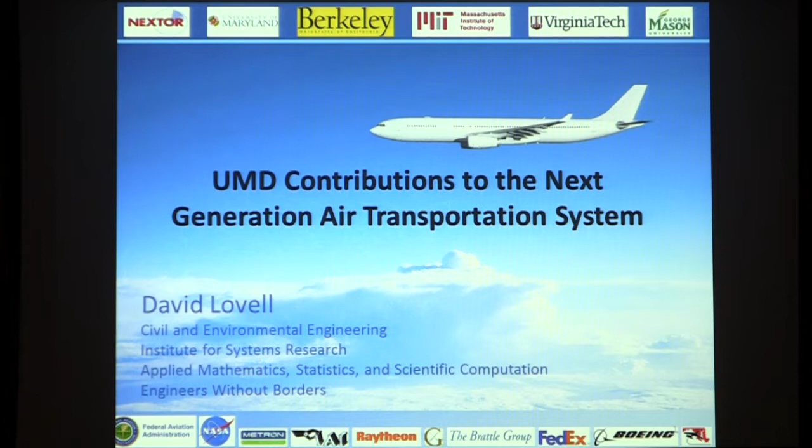But I want to talk about what's coming, and then in particular what we're doing that plays any part of a role in that. So here's how I had parsed what I wanted to do today. Tell you a little bit about the group that we have here in Maryland, who we are, tell you a little bit about this new idea, where we're going, and what we've been doing to get it there. We do a few different flavors of work ourselves. We work on these things called traffic flow management initiatives. I'll tell you a little bit about that.

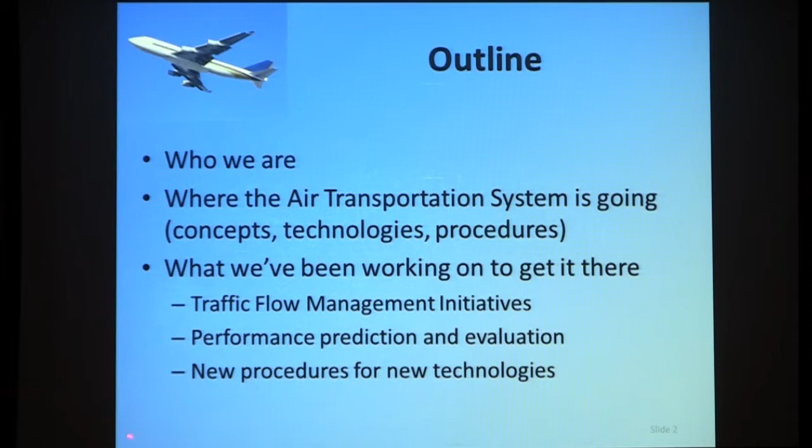We do a lot of work in predicting and evaluating how the system as a whole is performing at individual airports and overall, and even for specific carriers and even for specific flights. And then we're also doing some work on developing new procedures.

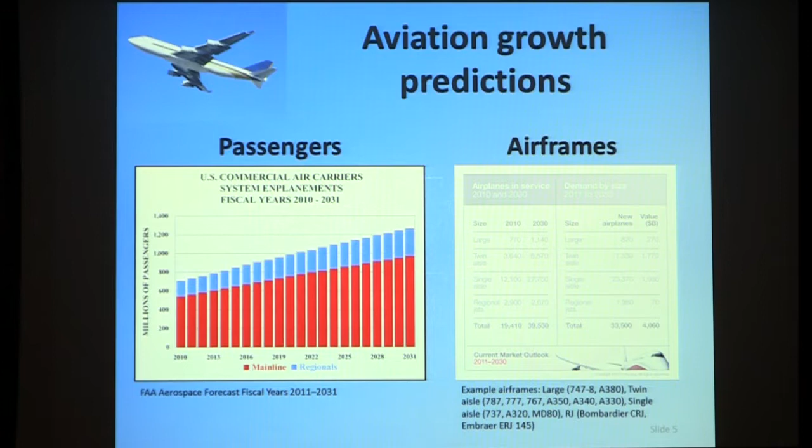The other thing that's interesting to look at, here's some statistics that Boeing put together in terms of their projections comparing last year and 20 years from now, how many of all of these different size aircraft are actually active in the fleet, and what do they expect to happen? And in almost every category, you can see growth. So these big A380 type ginormous planes, there's going to be a lot more of those. There's going to be a lot of the Dreamliners, 777s, all of that. There's going to be a lot more of the 737s and the smaller things that we probably spend most of our time on. The only thing that's going to go down is these little regional jets. That was a bit of a fad. It won't go away entirely, but they won't find quite as much use as people had originally thought.

Okay, so each of these slides is supposed to tell sort of a small piece of the story. So the first part of the story is that we're going to have more air traffic. It's going to get busier, and for those of you who fly a lot, you already know that it's already busy. And because it's already busy, you experience cancellations and delays and misconnections and all these kinds of things.

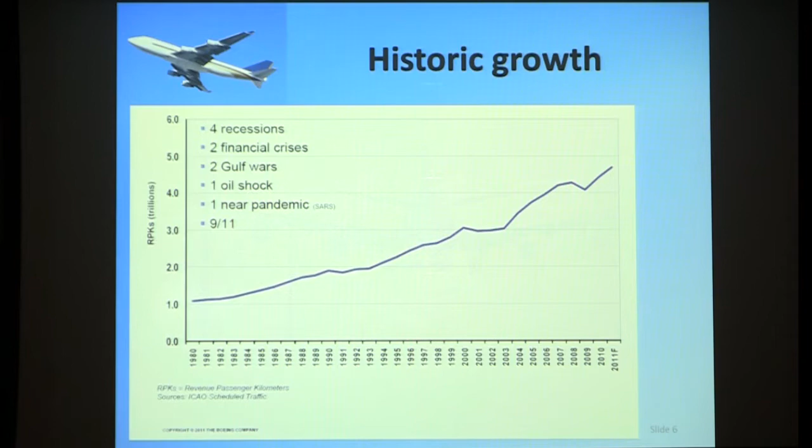So that's probably going to go up too, and probably at more than inflation. The fuel prices are playing a role in that. There are probably going to be different ways of assigning taxes and user fees that are going to change. So we're probably going to end up paying a bit more. But I try not to be too much of an economic prognosticator.

The previous picture was that air traffic is growing. This picture is whether it's growing or not, it's complicated. There are tons of competing and conflicting things that happen within the airspace system at individual airports that cause the whole system to be an enormously complicated thing to study.

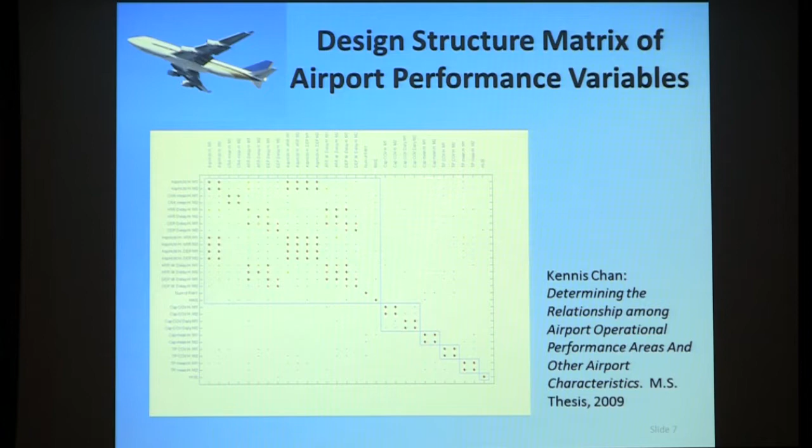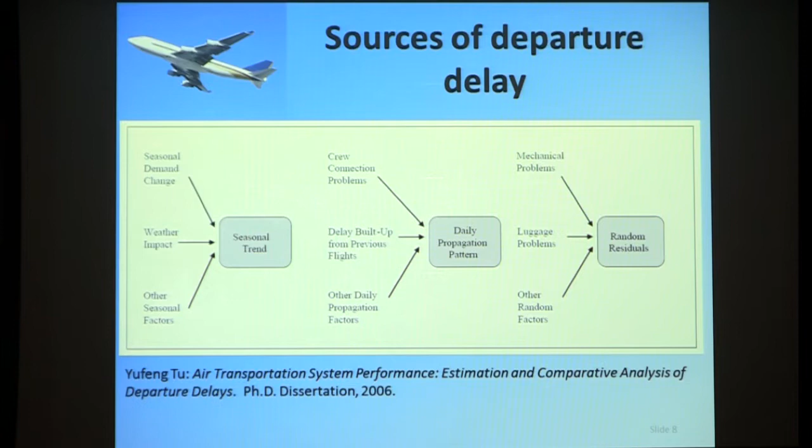The pilot will tell you that a piece of the plane fell off, and you have to wait for them to bring another one. You normally don't want to hear that. Or the crew was drunk, so they had to get another one of those. Or all of these different kinds of things. And there's more than just this, but each one of these things is an added complication that we have to worry about.

And delay, I think, is something that we talk about a lot because it's something that the individual passenger experiences and really can strongly relate to. Their goal is to be at a certain place at a certain time, and they've reverse engineered their schedule so that those things happen. And when you tell them, no, you're going to be an hour later than you thought, depending on how they had stacked things up after that, that could have a pretty big impact on them. Delays themselves, just looking at delay, is complicated and messy.

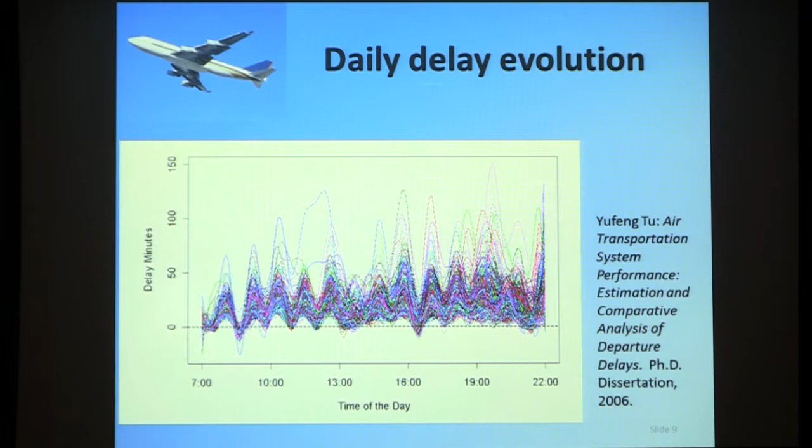Okay, so with that backdrop, aviation's complicated, it's busy, and it's only going to get worse. Enough noise was made, enough complaining happened, enough Congress people got involved that somebody said, all right, we've got to do something about this. So we're going to write some laws, create some new things, put a bunch of people to work on this problem, and see what we can come up with.

So this next generation air transportation system, NextGen is its most recent moniker, was created in 2003 as part of the Act reauthorizing the FAA at the time. You've probably read in the news recently that the FAA is not currently reauthorized, and they keep moving from continuing resolution to continuing resolution. Nevertheless, this is one of the last times that they were officially authorized.

As part of this, they created this Joint Planning and Development Office, which essentially means representatives from all of these important agencies have to get together and form committees and working groups and have meetings and panels and projects to figure out what we are going to do about what's thought of as unsustainable air travel demand growth.

So you can see the obvious things: the Department of Transportation, Homeland Security, Federal Aviation Administration, NASA, but there's also the President's Office of Science and Technology Policy, DOD is there because they have a role to play, Department of Commerce is there. All of those people are involved. You can't do a big government program without having org charts and structure and offices and blah, blah, blah. So this is kind of a big overview of who's involved.

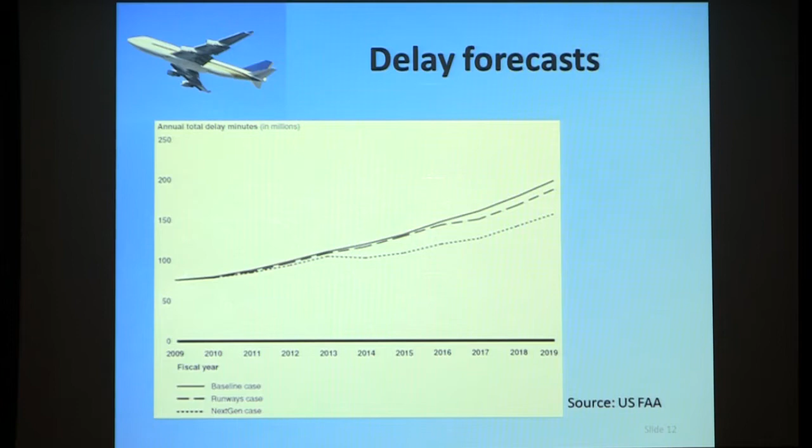Now, don't be too dismayed that the curve still seems to be rising, because that's against the backdrop of the fact that more people are going to be flying. So if you divide that by the number of people that are actually flying, your personal experience, which would be the ratio of those two things, might actually be a little bit better. Because this is aggregated across everybody, but the size of the everybody is actually going to grow.

Okay, so what are the sorts of things that we do to participate in this program? We do a lot of work on what we call resource rationing. In the United States, air carriers, for the most part, except at a few airports, can decide by themselves, purely autonomously, what they want to do. They say, I want to schedule a flight and I want to go from here to here.

As long as they're certified to fly that particular airplane and to land at that particular airport, and as long as they have a contract with the people at that airport to come out and refill the plane with fuel and to deal with the baggage and to put sandwiches on board and all of that, they're perfectly free to schedule a flight into that airport at whatever time they want. Nobody can tell them otherwise.

And they set all their schedules, and they're thinking about, well, what are my competitors doing and all of this, but they also know what do my clientele want to do. They schedule all of these flights, and purely by accident, most of the time in most places, the planes can take off and land with very little interference.

But also by accident, what tends to happen every now and then is more people schedule themselves into an airport than the airport can handle at any given time, and then somebody has to say, okay, we're going to have to do something about that, because we can't have them all arriving and trying to land on top of each other. And this is one of the things that air traffic controllers are responsible for, is to figure out that this is happening and to start pushing these planes back, or pushing them to the side, or having them fly around in circles for a while until they sort themselves out into an orderly system.

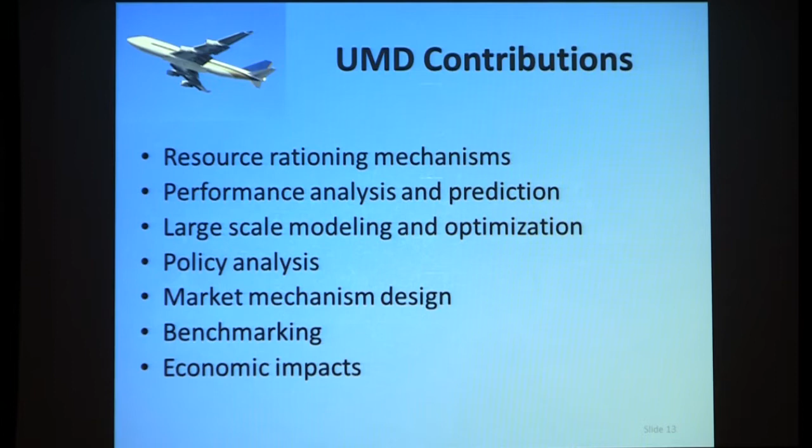Dave? Yes? I know that collaborative decision-making is and has been part of the research program for a long time. Yeah. How much of that is in practice now, like related to the resource rationing mechanisms, versus just whatever the FAA decision maker says? A lot, but there's still stones to turn over. So we have current projects that are thinking about new twists to put on that, but I have a slide in just a second that kind of illustrates that a little bit. It's a good question. So if I skip past that, remind me.

Here's a recent slide whose subject is basically some new rationing mechanisms. What happens right now, for the most part, is if it's time to start thinking about who gets to go next, that's mostly decided on the basis of the order in which you scheduled yourself into the airport. So they look at what would have happened had there been no weather and had there been no capacity problem.

What was the sequence of flights that were going to show up? Let's just take that same sequence and move it back. The problem with that is, if you imagine a flight, let's say, from San Francisco to Denver, and for a while there were thunderstorms in Denver. This happens a lot in the summertime, and so a lot of the planes were delayed.

The practice right now is that you don't act. If you've been held on the ground at San Francisco waiting for your opportunity to get to Denver, you don't get to take off until the weather actually clears in Denver. But it takes a couple hours to get from San Francisco to Denver.

So by the time the weather clears, in all honesty, if you had had a very good crystal ball and knew when the weather was going to clear, you could have taken off 2 hours ago and got there just as the weather was clearing, and everything would have been great. But that's sort of deemed to be an unsafe or too risky way to go about business, so we don't do it that way.

A different way of thinking about that, rather than rationing these flights by the time sequence, would be rationing them by how far away they are from the airport. And give the ones that are farthest away first crack so that they don't end up in that situation. The ones that are closer, if all of a sudden the weather clears, getting them in to fill those newly available slots is much easier, because they're only a half an hour away, whereas you're not worried about these flights that are hours and hours away.

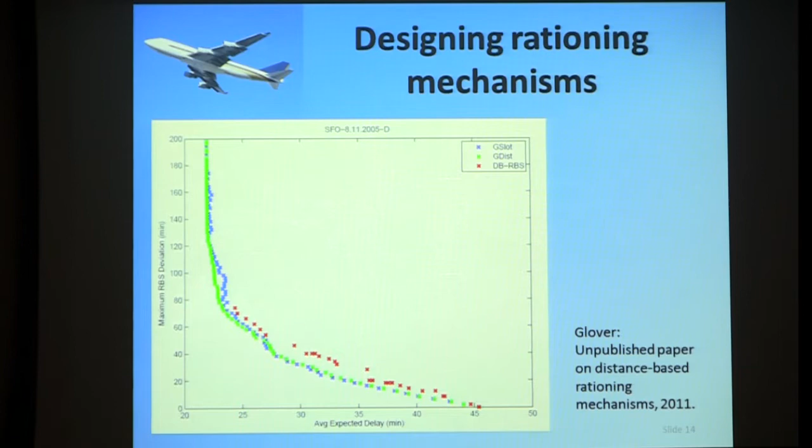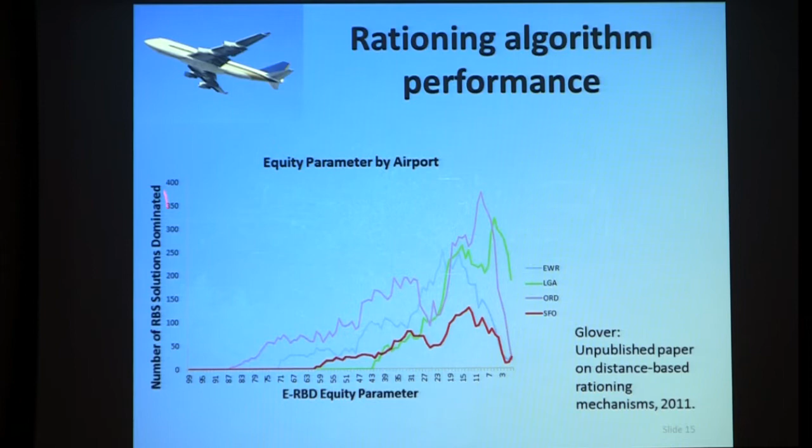This is sort of another way of looking at the same thing. Here's a bunch of different airports. And if we look at this parameter that sort of talks about how do we make sure that, using this distance-based scheme, these short-haul flights don't get too bad of a disposition, how do our new algorithms compare to what would have been done under the time-based rationing?

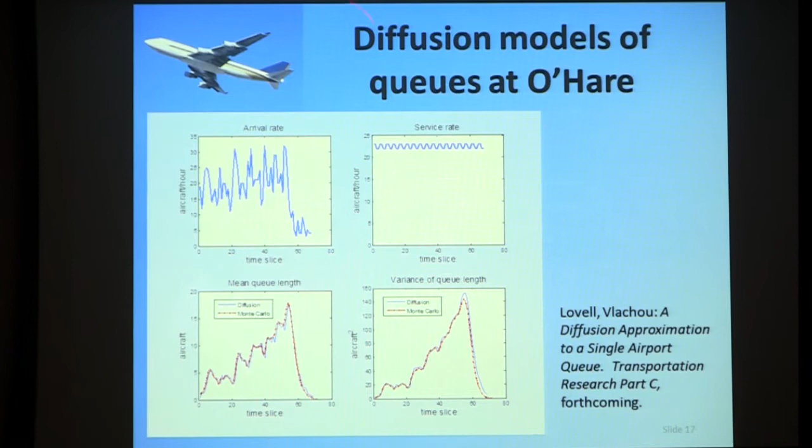We do this sort of modeling in lots of different ways. Here's a picture of diffusion models that one of our students was working on. And this shows sort of similar things. And the point of this picture was really just to show that we did a good job building the model. But we've done this for lots of different airports, lots of different scenarios, lots of different time periods and so forth.

Here's another problem that we worked on. I said that we're going to see more and more planes, and some of the planes that we're going to see more and more are these gigantic things like A380s, assuming that the engines don't catch on fire and fall off the side of the plane, which has already happened once. Well, it didn't fall off, but it caught on fire. They're expecting to see lots more of these things, particularly at places like Los Angeles, because the Asia market, China and places like that, are expected to start really sending a lot of people in this way.

A380s are already coming into Los Angeles from Sydney and from Singapore, and maybe there will be even more of them. San Francisco is the same. San Francisco has tested them. Has tested. They don't yet, to my knowledge, have regular operations into San Francisco, but they've... Lufthansa did. Lufthansa, yeah. Okay, so that's probably recent.

Yeah. One of the tricks with those things is that you actually have to fly the aircraft into the airport when nobody else is there and start asking yourself, what's going to happen when this giant plane gets here? Exactly. You might remember in the news not too long ago, an A380 was going down a runway at JFK or Newark? JFK, and actually clipped another plane as it went by, spun that other plane around in a circle, and people on that plane were not terribly excited about that. These A380s are so big.

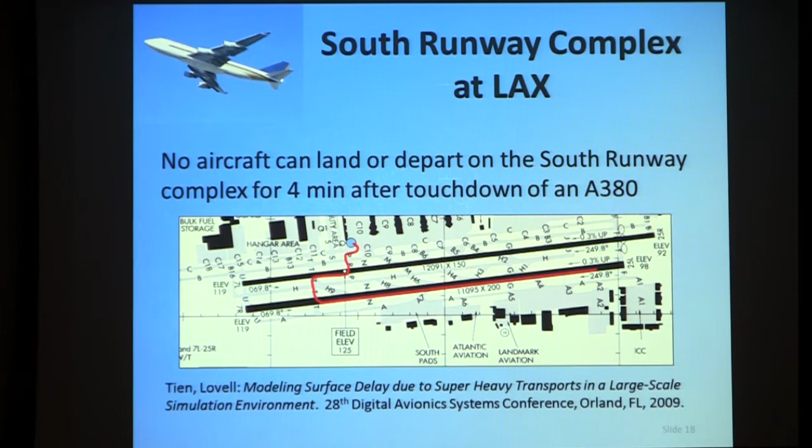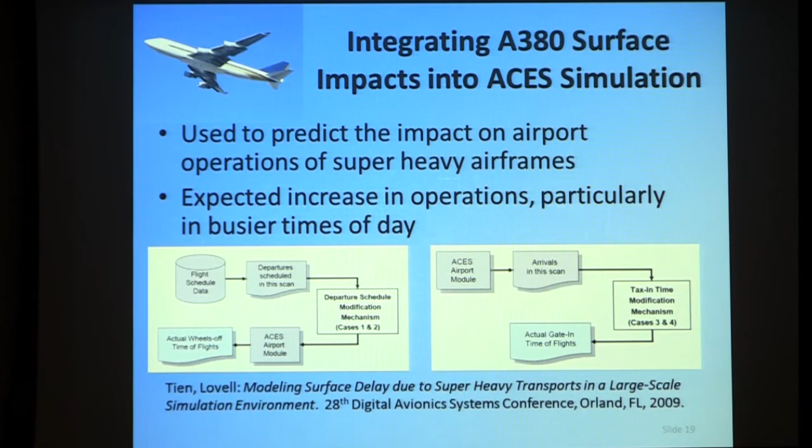So we were working on helping them design the procedures for certain airports and building this sort of thinking about what's going to be different when these things happen into a big simulation package that is used quite a bit in the aviation industry to model what's taking place in the U.S. airspace system over the course of the day. And this was the project actually that we worked on with Intelligent Automation. There were lots of other aspects of the project, but what we were doing was looking at particularly what happened to the big planes when they were on the ground, taxiing around, moving back and forth. This project ended? That one's done.

Yeah. I said a little bit earlier about market mechanisms. We spent a lot of time, and Raghu has spent a lot of time on the same kind of idea, thinking about how are you going to start making people pay money for this constrained resource. Lots of economists would argue that if you have something that a lot of people want, and in fact more people want it than there are elements of that thing to give up, then the way to figure out who should get it is to make them start paying for it. And if they really want it, they'll pay for it. And if they're not willing to pay for it, then they must not have wanted it that much.

The problem with things like this is if you go to a current airport and you say, okay, well, who has the right to land there now? And you say, okay, we're going to take that all away from you and we're going to start selling it to whoever wants it. A lot of carriers complain because they've put a lot of money into building terminal facilities and other things at particular airports that they don't want sort of swept under the rug tomorrow, and then they have to compete with everybody else when they thought that all of this time they had been establishing a presence. So one of our ideas was to take this stuff away from them in small pieces so that it wouldn't be quite as drastic.

One of the other problems with this is that you start saying, okay, well, we're going to auction these things, or we're going to offer them up for sale in some other way in the market. What will the price be, or what should the price be? You don't know. The advantage to only selling, let's say, 10% of your available capacity every year is that you can do something called price discovery along the way.

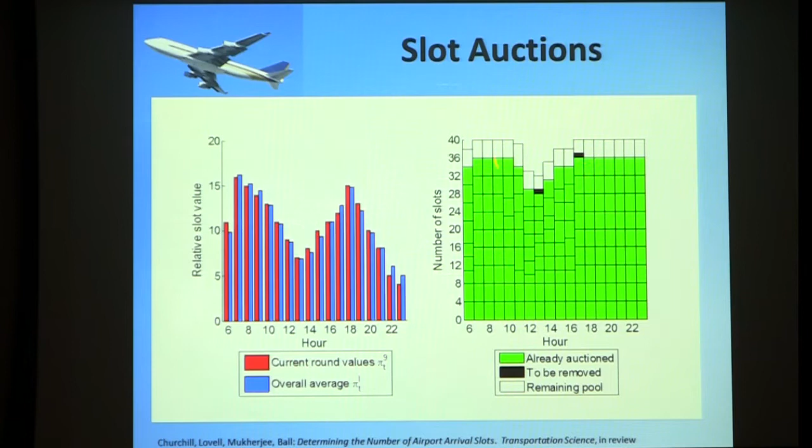people to fly in that middle part, so that if, for whatever reason, you did have some congestion build up here, you would have a chance during this time to let all of that flush out before you start again in the afternoon and get busy again. And that's sort of the rationale behind why this little bit shows up here in the middle. Okay, so these government people that are trying to figure out how we're going to do this,

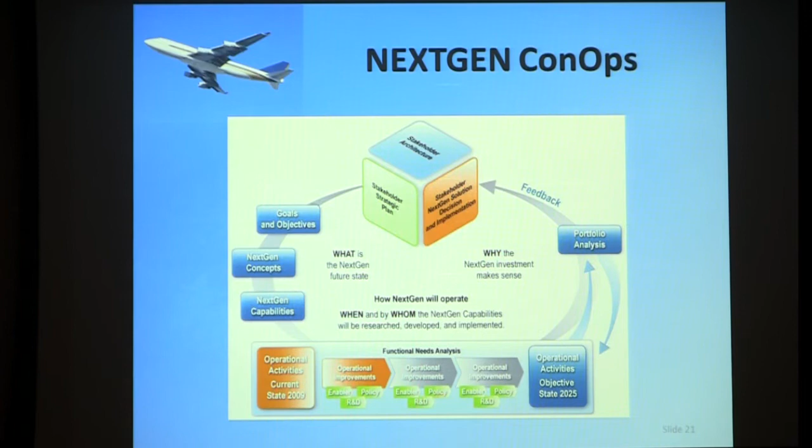I say this with a little bit of cynicism. I sort of wish that they had spent as much money coming up with technologies and actual ideas for implementation as they did coming up with nice graphical designs of pictures with arrows and boxes and stuff. For years and years, you could find tons of pictures with arrows and boxes, and you couldn't find anything that talked about, well, what are we actually going to do? That's changing now, which is good, but still, you can get buried in these kinds of pictures, unfortunately.

So that seems like no big deal. Most of your cars already do it, but the aviation environment is very, very different. It has to be much more robust. Almost everything that goes into the cockpit has to go in twice in case the first one doesn't work anymore. There's all of these very stringent technical requirements that have to be met. There's still a lot of talk over the radio. It would be nice if people didn't have to talk that much. You can imagine many different information systems that are at play at once. It would be nice if somebody stitched them all together into something that was more cohesive.

The aviation system relies very heavily on forecasts of the weather. You can get a weather forecast from about 25 different people right now, if you want it. They all talk about it in slightly different ways. They have slightly different models for doing it. They say different things. They have different projections. Which one is the one that we should be basing our operations on?

It's still very much the case that if you can't see very far, then you don't get to do very much. Although with technology, that doesn't need to be the case, so we could do better there. And it's still very much the case that air traffic controllers are dealing with making sure this particular plane does not run into this particular plane.

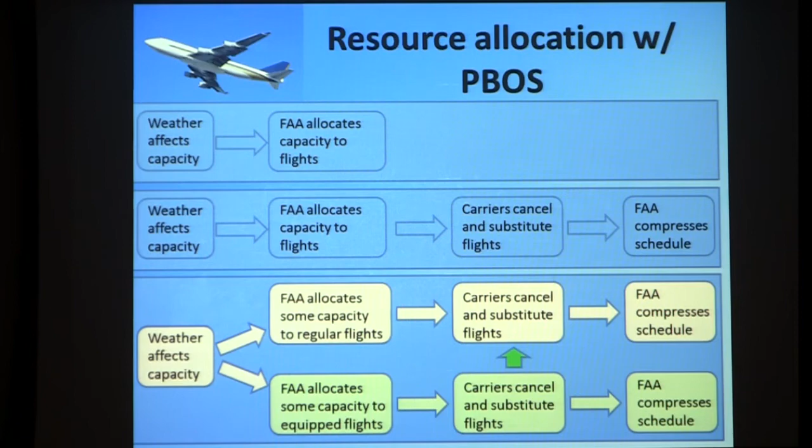If some holes open up here, a better equipped airplane could still use one of these sort of old-fashioned slots. So there's still a chance for some movement to happen there within the same carrier. Then when you're all done, the FAA takes one final look, makes sure there aren't any holes. If there are, it sort of shoves everybody a little bit farther forward, and you move on.

So what are these new technologies that we're talking about? The big one is ADS-B, Automatic Dependent Surveillance Broadcast. I'm an airplane, I have a GPS, I know where I am, nobody else knows where I am, because all GPS does for me is tell me where I am. I start yelling as loud as I can on one of these frequencies, here's who I am and here's where I am. I say more things than that, but those are some of the important things. If the people on the ground can hear everybody saying that, that becomes a form of radar.

It's not physical radar. You're not bouncing something off of the plane and measuring how long it took to come back and remembering where you were pointing and then plotting a picture of that. You're just listening to a bunch of people telling you where they are, and you're plotting that on a screen, assuming that you can trust them and that they're all saying that. You'll still have the radar going at the same time as a secondary system. That's what we call ADS-B out. So that's everybody sort of broadcasting, here's who I am and here's where I am.

The other part of it is called ADS-B in. An aircraft could be listening to all of its neighbors who are saying these same things. Now it has situational awareness. It knows where all the other aircraft are. That's something that they, for the most part, now don't have. The controllers on the ground know where everybody is. Up in the air, unless you can see them out the window, you don't know where they are.

If you have certain parts of the airspace where only aircraft that have these capabilities are allowed to fly, then you could feel perfectly safe making certain kinds of maneuvers without interacting with the air traffic controller, because you know where everybody else is.

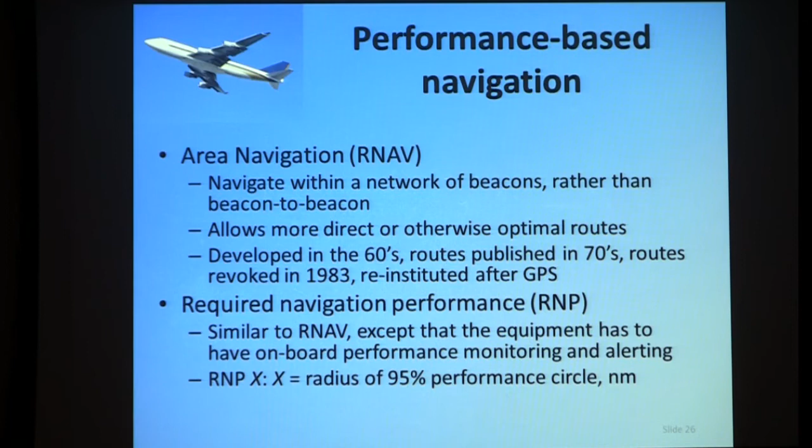And one of the things that they allow aircraft to do under this new RNP thing is they allow them to do things like change altitude at the same time that they're making turns. Which, if you think of military pilots, they do that sort of stuff all the time on the fly. But commercial aircraft, for the most part, don't do that. And there are places where if you look at some of the conflicting routes, that's what you want to do in order to make these streams of aircraft get along better.

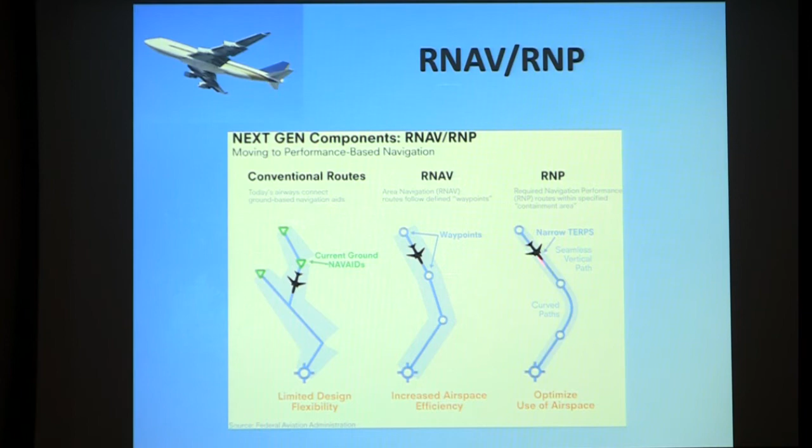So here's sort of an idea. Here's the old system where you're flying from point to point. Here's the new system where you essentially invent these virtual waypoints. They're not actually stations on the ground. You just define a point up there in space someplace, and you fly between those. But you can do that because you know where you are relative to some of these other things. And with the new system, you can tighten that up even more. So here's a couple of pictures to show you what's going on.

I'm sorry, let's see, I better get done here pretty quick. So let me blast through this, and then I'll fly to the end, and then if you have some questions, we'll take those. I'll have to skip a few slides.

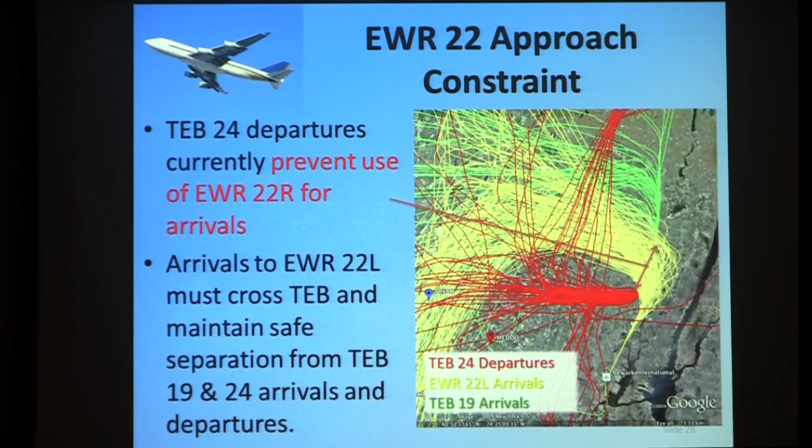This is a set of flight tracks superimposed on each other. They get real accurate when they get down on this instrument approach, but prior to that, they're all over the place. Partly because somebody probably told them to do that, and partly because they were staying away from somebody else that was also in the air at the same time. But the idea is to tighten up all of these approaches, make them much more organized, and you only have to do it at Newark.

You can still let the planes coming out of Teterboro be sort of wild and crazy. If you can tighten up these other approaches, you can do a much better job.

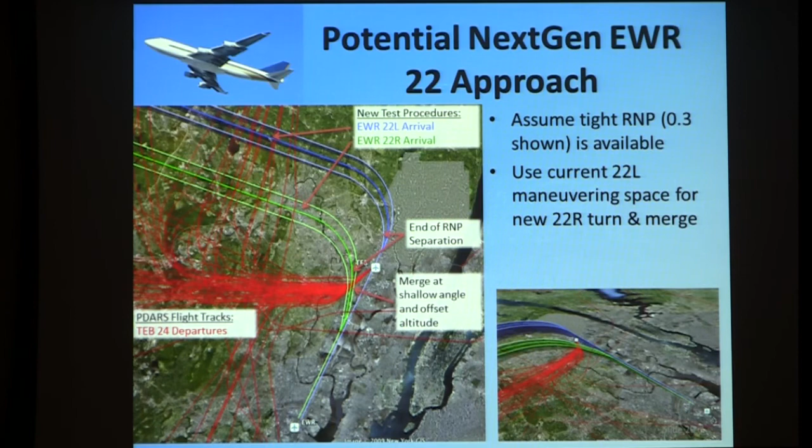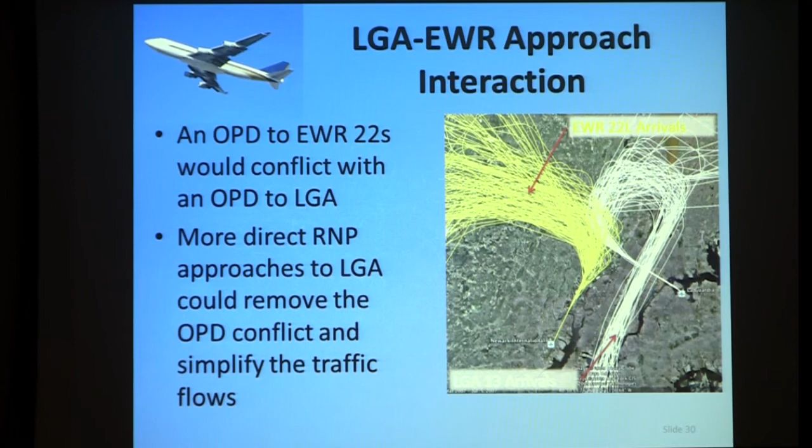Another version of the same thing: this is arrivals to Newark conflicting with aircraft coming in and out of LaGuardia. Just bad luck that the best way to align the runways at LaGuardia and the best way to align the runways at Newark with respect to the winds has them flying these planes into the same airspace. It's just their dumb luck, but it is what it is. It's also dumb luck that it also happens to be one of the busiest parts of the United States where everybody wants to come and go from. But if you could clean that up, it might look a lot more like this.

So let me bounce ahead. I was going to tell you a little bit about these descents, a little bit more about stuff we've been working on, but let me just get to the last slide here. What are we going to continue working on as we move forward? We're still working on these resource allocation mechanisms, this collaborative decision making for allocating resources both at airports and in the air. We're working on terminal area procedures. We're still working on constructing metrics and measures for predictability.

A version of these mechanisms that we're working on are the ones that allow better equipped aircraft to have better service. Therefore, they would be willing to pay for certain things. These kinds of things are what we imagine working on at Maryland, at least, for the duration of the next 7 years of this contract.

And you might have noticed as a final note that the set of departments and places on campus that we draw our talent from is pretty diverse, because this kind of research doesn't necessarily speak to just a single department. There are civil engineers, mathematicians, computer people, systems engineers, aeronautical engineers, business students, optimization people, lots of queuing theory people, economists, whatever, whose inputs and talents can be put to use on the kinds of projects that we work on. So we have a pretty diverse group of people.